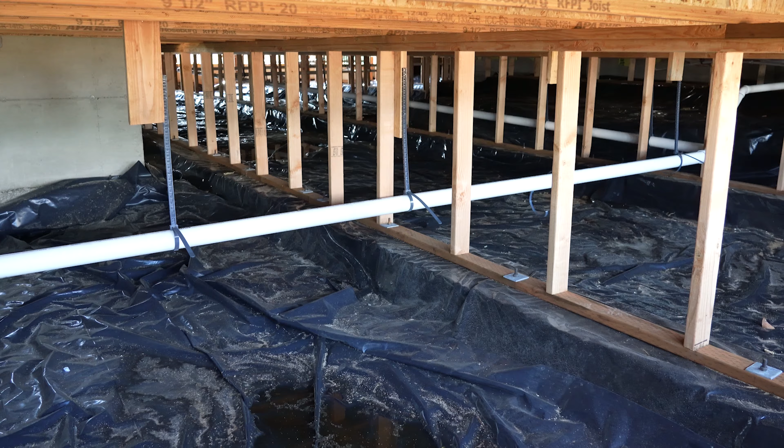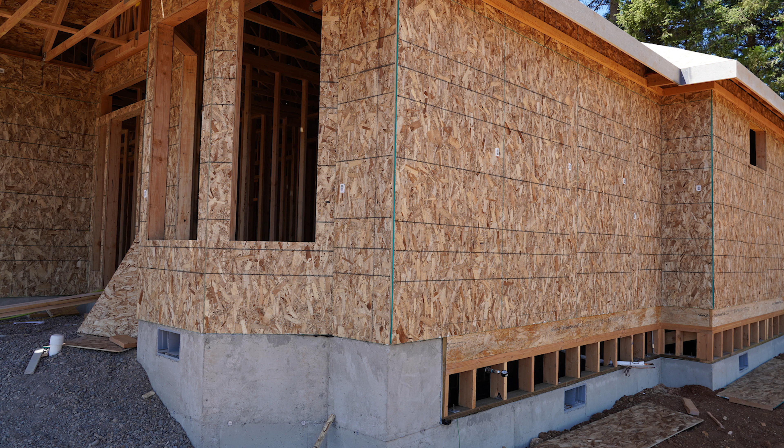This is the Code Update Training for Chapter 11 of the 2023 Oregon Residential Specialty Code, also referred to as the 2023 ORSC. Chapter 11 represents the energy efficiency provisions of the 2023 ORSC. This training video covers significant changes included in this chapter. This video is a continuation of the 2023 ORSC Update Training.

Please note, this training pertains to the residential energy efficiency provisions only. The commercial provisions can be found in the Oregon Energy Efficiency Specialty Code, also referred to as the OEESC.

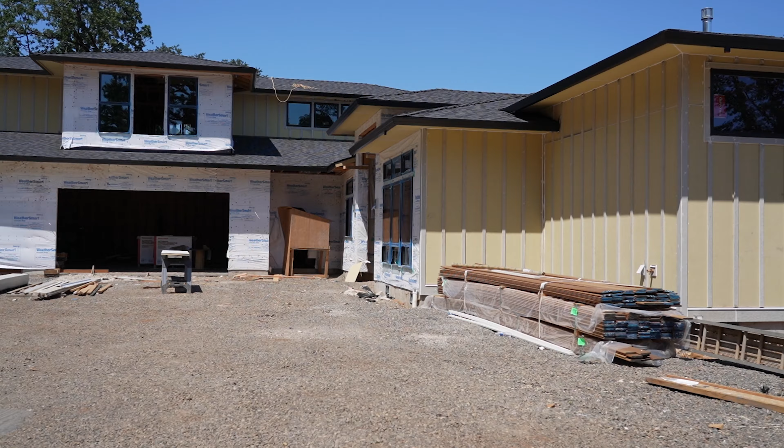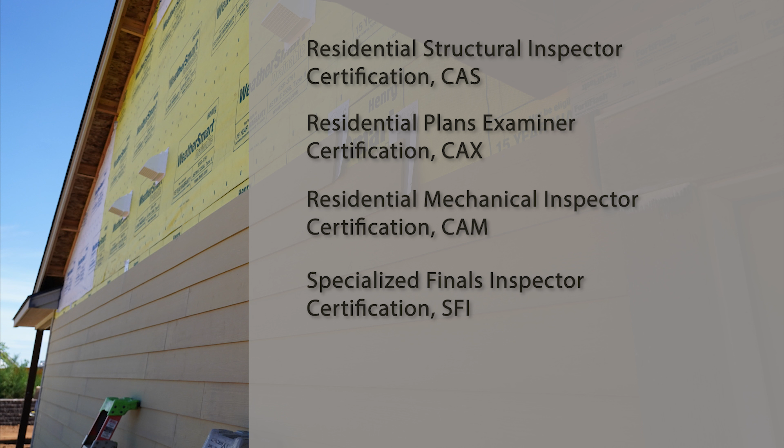All BCD inspector and plans examiner certification holders are required to complete code-related update training, which is provided by the division. The certifications that require this training are the Residential Structural Inspector Certification, also known as the CAS, the Residential Plans Examiner Certification, the CAX, the Residential Mechanical Inspector Certification, or CAM, the Specialized Finals Inspector Certification, the SFI, and the Specialized Solar Photovoltaic Certification, the SSI.

The objective for this training is to identify the significant technical changes to the energy efficiency design requirements resulting from the adoption of the 2023 ORSC.

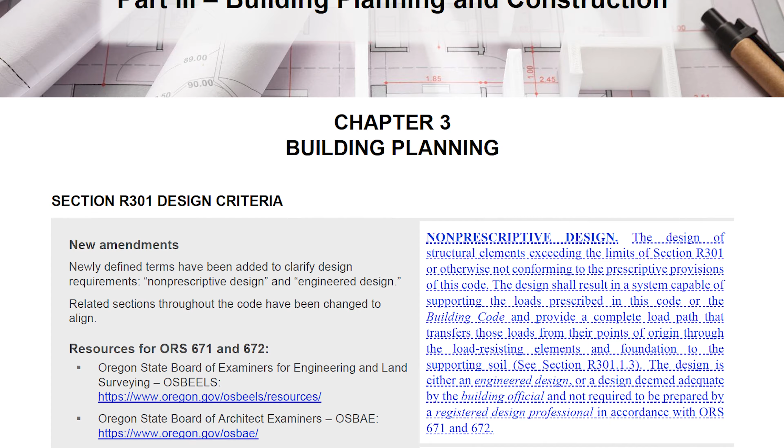For this training video, the division has also created a supplementary code adoption summary that includes the Chapter 11 Oregon amendments highlighted in this video and other important information about the new code. Please note that the formatting for code changes in the summary may be different due to the inclusion of both new and existing Oregon amendments. The code adoption summary is linked in the video description below, along with chapter timestamps to aid in navigation through this presentation.

Hello, I'm Kelly Thomas, Energy Policy Analyst for the division. To kick off the significant changes to Chapter 11, we'll start with existing buildings. Then, in a few minutes, we'll cover new buildings.

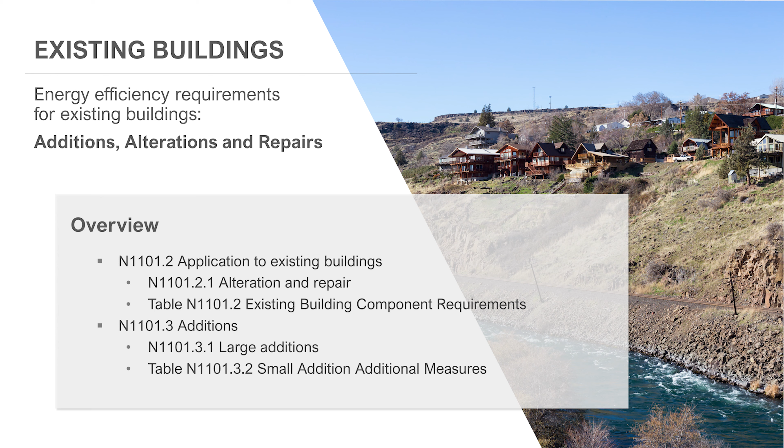For existing buildings and additions, changes have been made to the following sections: N1101.2, clarifying subsection 1 for alteration and repair, along with Table N1101.2 for existing building component performance requirements, and N1101.3, clarifying subsection 1, along with adjustments to the associated table relative to the additional measures options when constructing additions. Let's look at these in more detail.

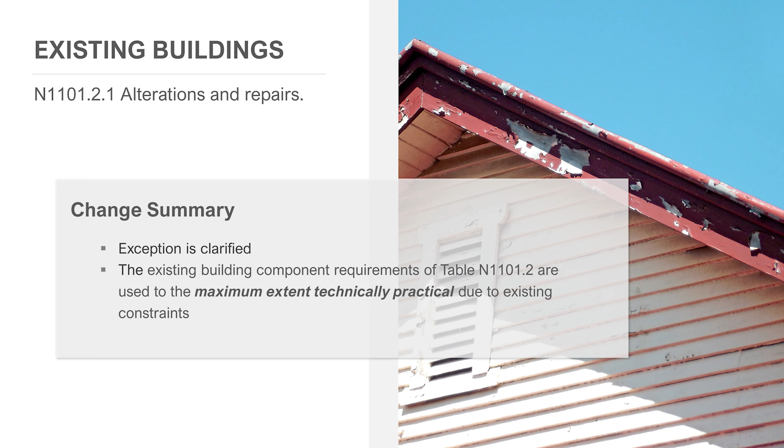In N1101.2.1, we simply clarify the maximum extent technically practical provision, including why the exception is needed. Here, you'll see the existing constraints language is expanded to include real-world constraints such as available cavity depth and allows flexibility for similar constraints.

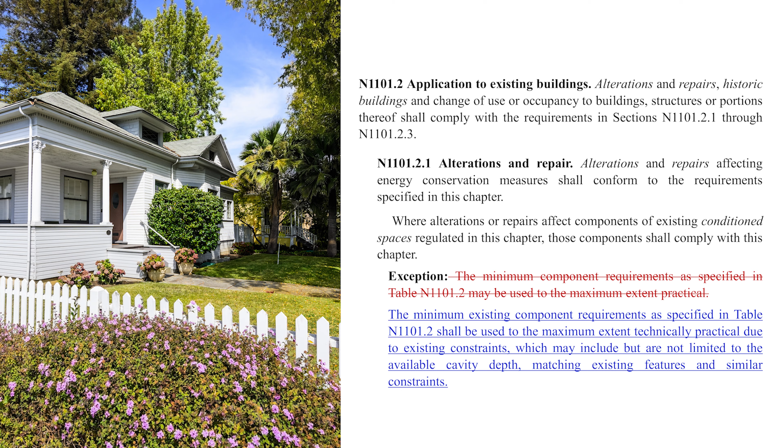There are a few changes to Table N1101.2, existing building component performance requirements. First, we clarified the vaulted ceiling and underfloor joist depth values. Then, we adjusted windows and glazed doors to have an equal performance value. Slab edge perimeter insulation is no longer applicable, as it simply isn't practical for existing buildings. Finally, we deleted the air duct provision, since that is picked up in the HVAC section and not related to the building thermal envelope.

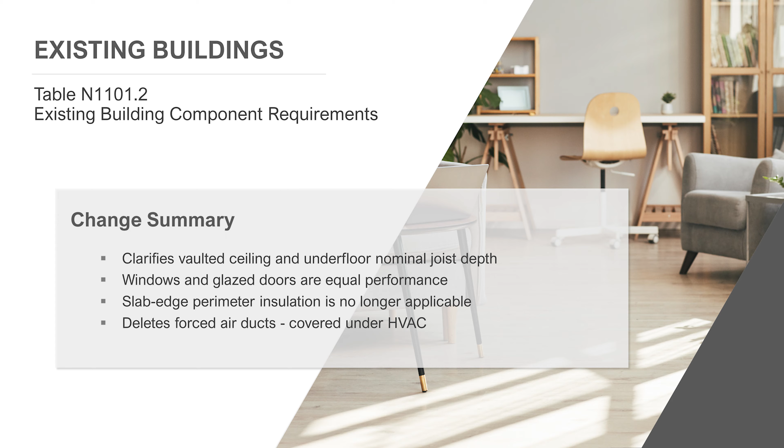Here are those changes. The vaulted ceiling and underfloor joist depths are now clearly split at the 2x10 joist size. Glazed doors are incorporated into the window performance requirements. Classification of exterior doors with greater than 2.5 square feet of glazing was confusing and is no longer needed. Which doors are fenestration versus an opaque exterior door will be discussed in later slides. Finally, the slab edge and air ducts are deleted.

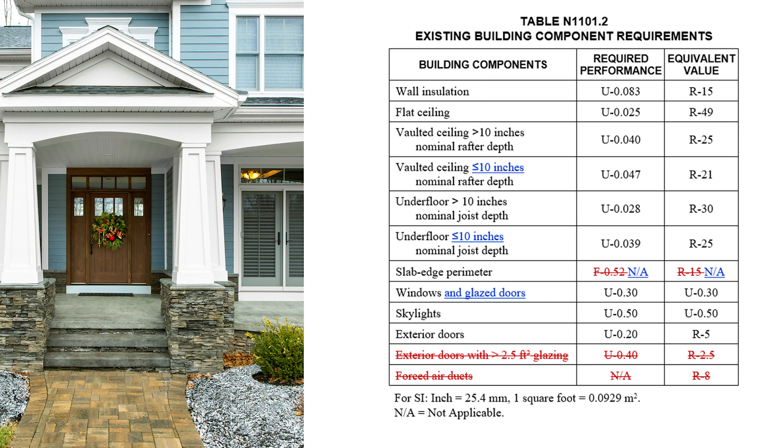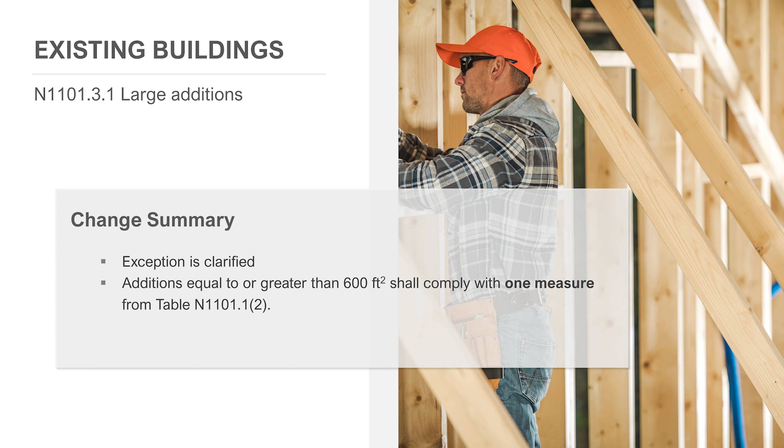Additions. We clarified that one measure from Table N1101.1, parens 2, must be selected for large additions. You can see that reflected here. Our table numbering also shifted slightly, so that is recognized.

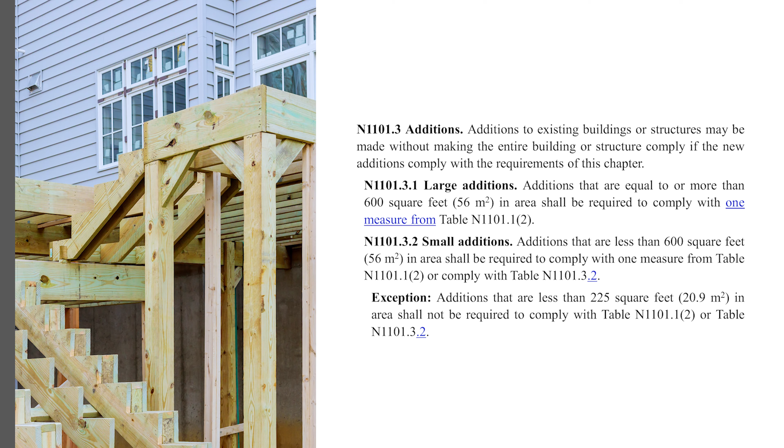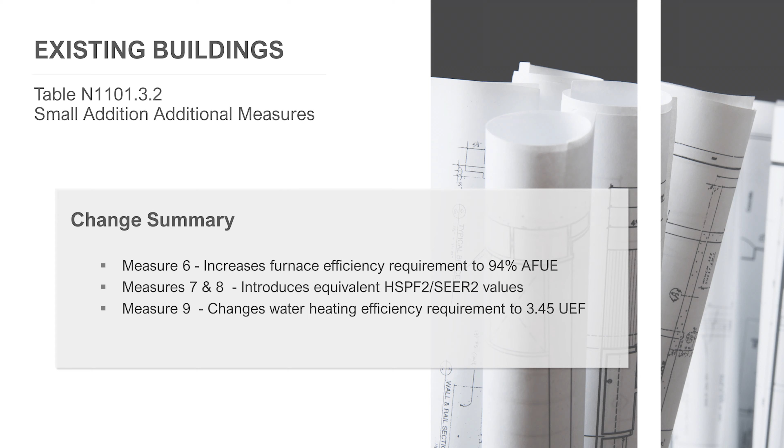Let's take a look at those changes in detail. The furnace efficiency increased from 92% AFUE to 94% AFUE, a common efficiency in the marketplace. With measures 7 and 8, we simply introduce the HSPF and SEER equivalents, HSPF2 and SEER2. The latter come into effect on January 1st of 2023. HVAC systems will have both for a while, and either are acceptable until stock utilizing HSPF and SEER are depleted.

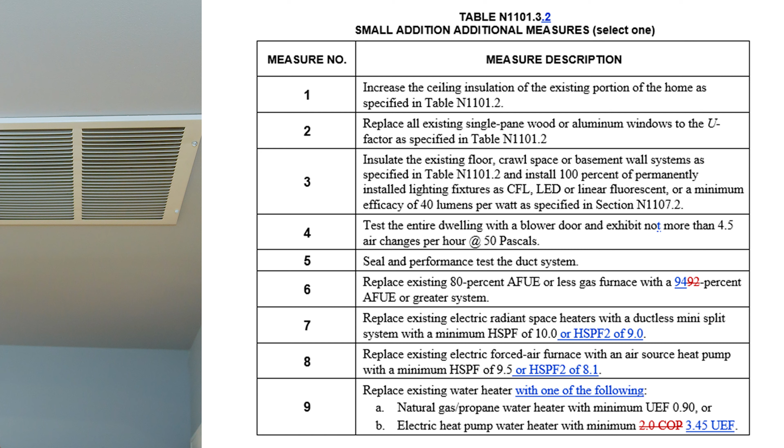Measure 9 changes the water heating efficiency requirement to the industry standard Uniform Energy Factor, or UEF. In this case, 3.45 UEF.

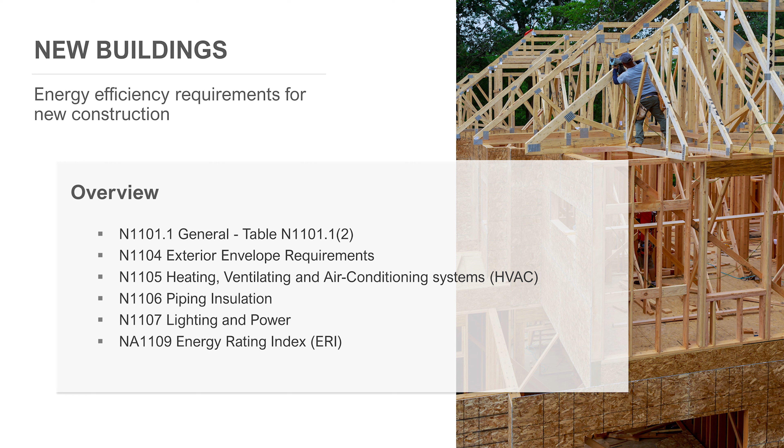New buildings. New construction has significant changes to these main sections: N1101.1, specifically Table N1101.1, parens 2, which is relative to the additional measures; N1104 exterior envelope requirements; N1105 HVAC systems; N1106 piping insulation; N1107 lighting and power; and finally NA1109, a performance path known as the Energy Rating Index, or ERI.

Diving into the revisions for new dwellings, our first stop is Table N1101.1, Parens 2, Additional Measures. There are changes to Measures 1 and 5 for HVAC and ductless heat pump efficiency, Measure 2 relative to water heating efficiency, Measure 7 glazing area has been deleted, and Measure 8, now 7, regarding air leakage and ventilation. Let's look at the changes to that table.

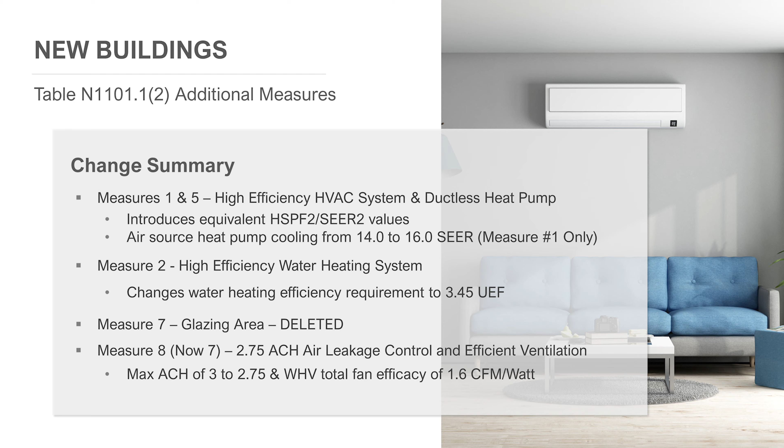Measure 1 increases air source heat pump cooling efficiency from 14 to 16 SEER. It also provides the equivalent HSPF2 and SEER2 values. As previously explained, we have two values using old and new efficiency ratings as required by federal rules.

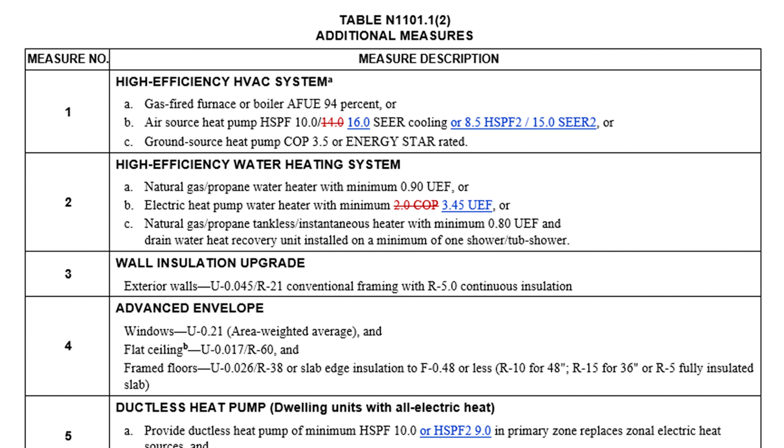Measure 2, similar to Table N1101.3.2, changes the water heating efficiency requirement to 3.45 UEF. Measure 5 provides the equivalent HSPF2 and SEER2 values. The HSPF2 for ductless heat pumps is intentionally higher than that for air source heat pumps.

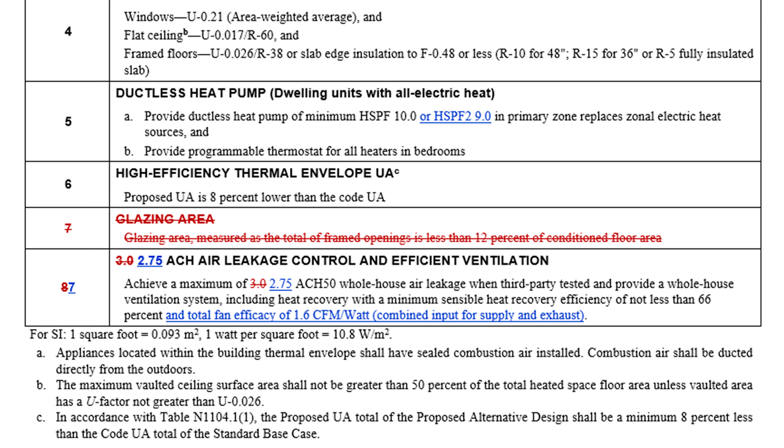Measure 7 is deleted entirely as it was a loophole preventing code progression. Measure 8, now 7, reduces the ACH 50 from 3 to 2.75 when using this additional measure. The prescriptive limit was also reduced, which we'll review momentarily. The new language also sets total fan efficacy at 1.6 CFM per watt.

Feel free to pause this video in order to locate BCD's high efficiency thermal envelope calculator relative to Measure 6 via the QR code.

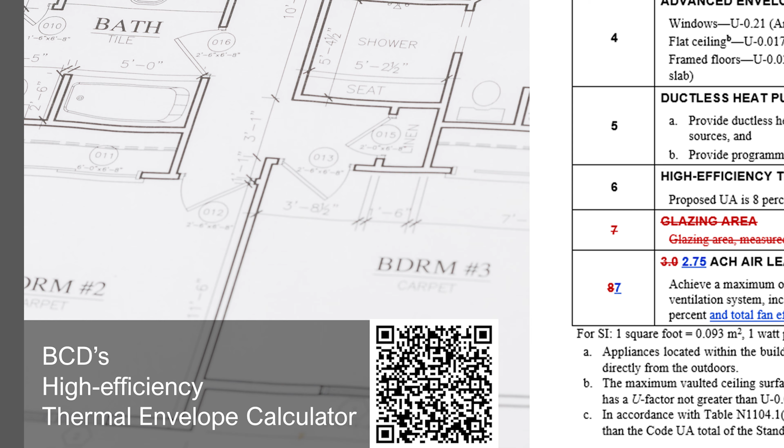The following significant changes have been made to N1104 exterior envelope requirements: Table N1104.1, Parens 1, the prescriptive thermal envelope requirements; N1104.3, exterior doors; and N1104.8, air leakage. Let's look at those changes.

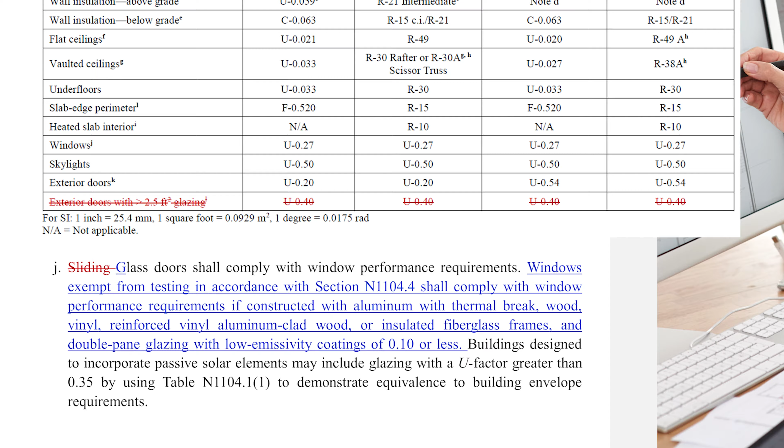Table N1101.1, Parens 1, has a revised footnote J, equating glass door performance requirements to that of windows. As such, the exterior doors with greater than 2.5 square feet of glazing is deleted. Here you can see the exterior doors reference is deleted, and footnote J now reads as seen here, where glass doors now equal the window performance requirements.

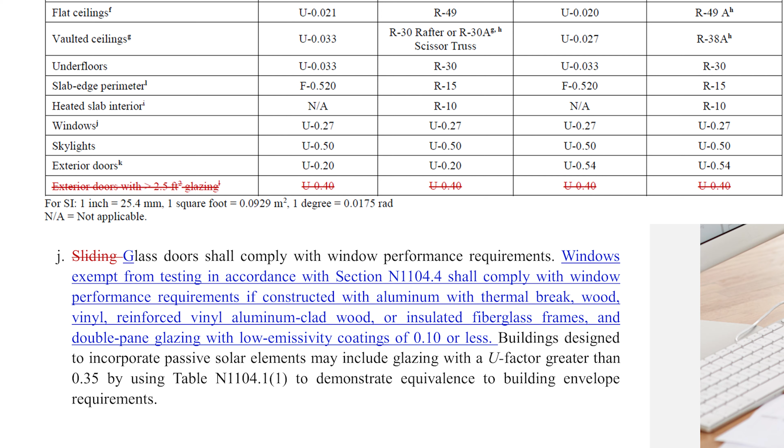Glass doors meet the window's U factor of 0.27, and opaque doors meet the exterior door U factor of 0.20. The windows exempt from testing language is also clarified.

Exterior doors and windows. Section N1104.3 further aligns glass door performance with window performance, deleting exception 3. And the air leakage requirement for exterior doors was moved into the charging statement.

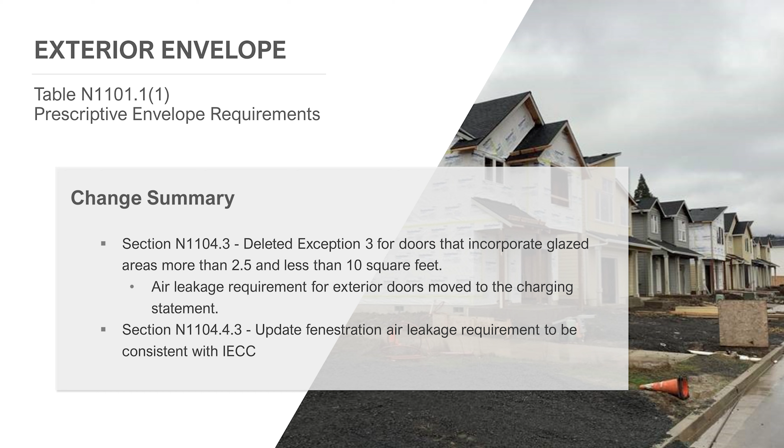Section N1104.4.3 updates fenestration air leakage requirement to be consistent with the IECC. Note here that doors shall be tested and labeled just like windows. Air leakage requirements for doors are contained in section N1104.8. Here again, doors that incorporate glazed areas are no longer an exception.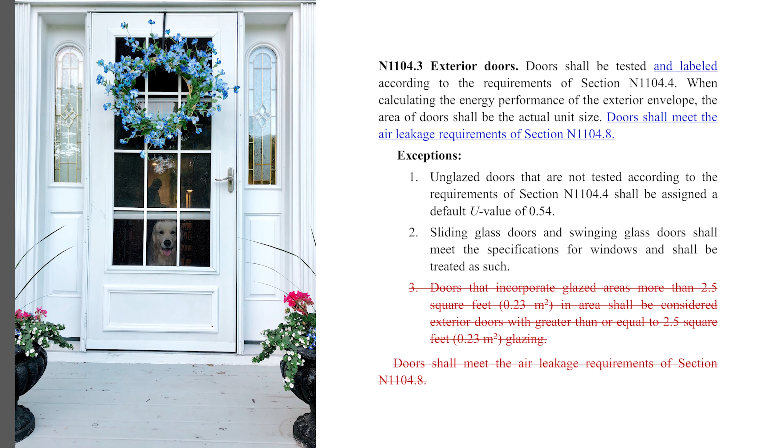New section N1104.4.3 Fenestration Air Leakage. This language is consistent with the IECC.

N1104.8.2 Sealing Required updates this optional path to utilize blower door testing. Blower door testing is not mandatory.

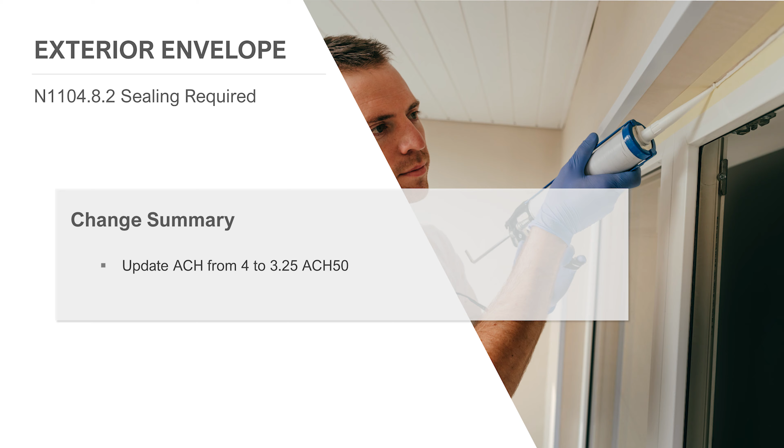The optional blower door test results are reduced from 4.0 ACH50 to 3.25 ACH50. Again, this is an optional path. These new limits are based on data from construction across Oregon where testing occurs. Achieving a continuous air barrier can be done by implementing best practices, which we outline next.

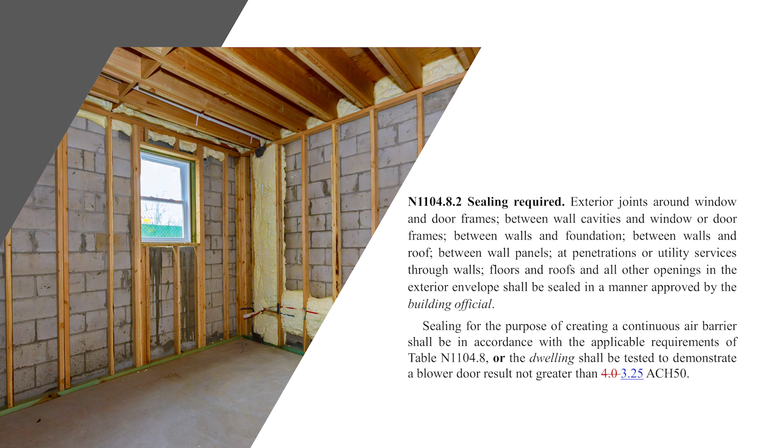Table N1104.8 is an overview of the minimum best practices for air sealing, and they are required. We clarified the windows, skylights, and doors criteria as seen here. You may want to take a minute to pause this video and review the air barrier criteria. Note that an air sealing technical bulletin will be available on the BCD website under the ORSC energy provisions.

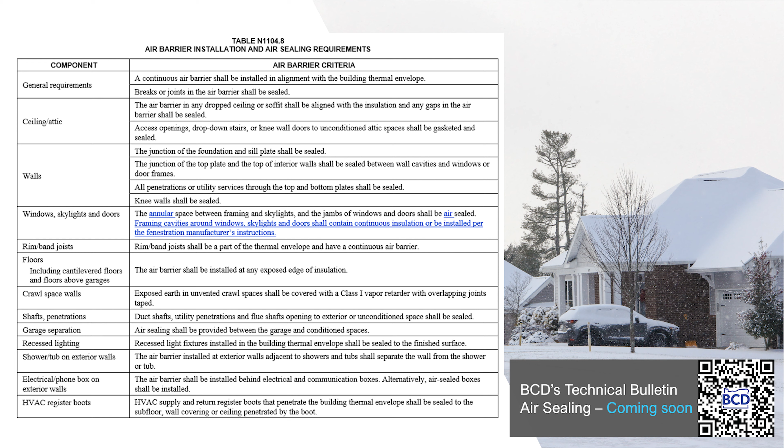N1105 HVAC systems. These significant changes have been made. N1105.3 Installation of ducts and air handling equipment. Deeply buried ducts are now addressed in 3 new sections, N1105.3.1 through N1105.3.3. N1105.4 HVAC controls has changes to sections N1105.4.1.2 Smart Thermostat, a new section, and N1105.4.1.3 Heat Pump Controls. While changes to N1105.6 Ventilation Fan Efficiency addresses Central Fan Integrated, or CFI, ventilation system efficiency. Let's look at those in detail.

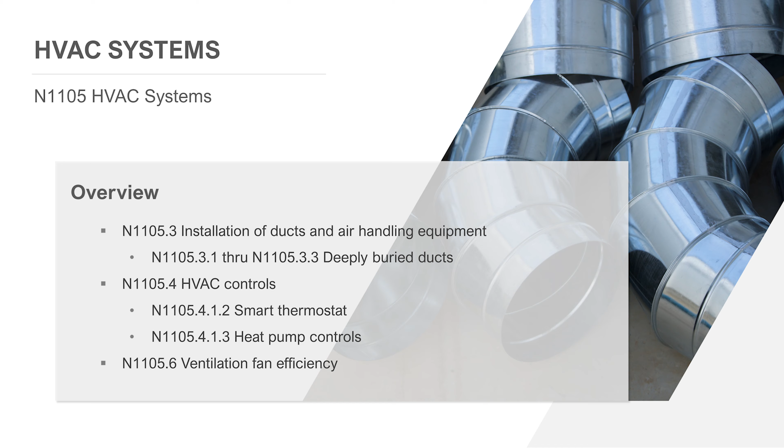N1105.3 Installation of ducts and air handling equipment. The language now requires all ducts, air handling equipment, and appliances to be located fully within the building thermal envelope. It revises the ductwork exception from 5% of the system length to 10 feet total. This change makes it easier to interpret and apply during plan review and inspection. Finally, revisions are made to the exceptions for ductwork located outside of the building thermal envelope.

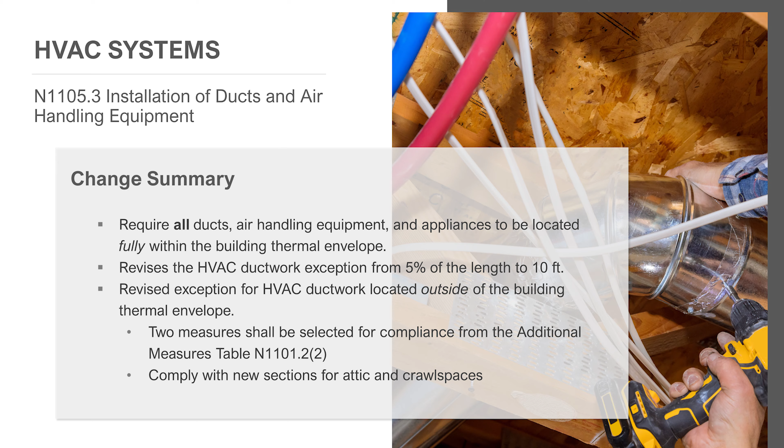2 measures shall be selected for compliance from the additional measures table N1101.2 parens 2, where only 1 additional measure is required if they are located in conditioned space. And 3 new sections were developed for attics and crawl spaces.

Ducts outside of the thermal envelope must be deeply buried. Deeply buried ductwork is outlined in these 3 new sections: N1105.3.1 for attics, N1105.3.2 for unvented, unconditioned crawl spaces, and N1105.3.3 for vented crawl spaces.

In all sections, the ductwork itself shall be a minimum of R8 unless meeting the exceptions for vented attics and vented crawl spaces. This does not include the additional insulation and or other requirements.

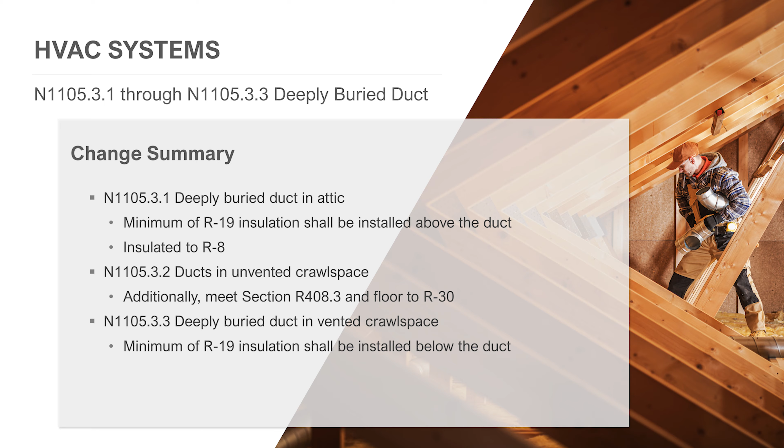The changed language clarifies that N1105.3 applies to additions. The 5% of the HVAC system length exception is clarified to allow for 10 feet of ductwork, not the system, to be located outside conditioned space. This allows for better enforceability.

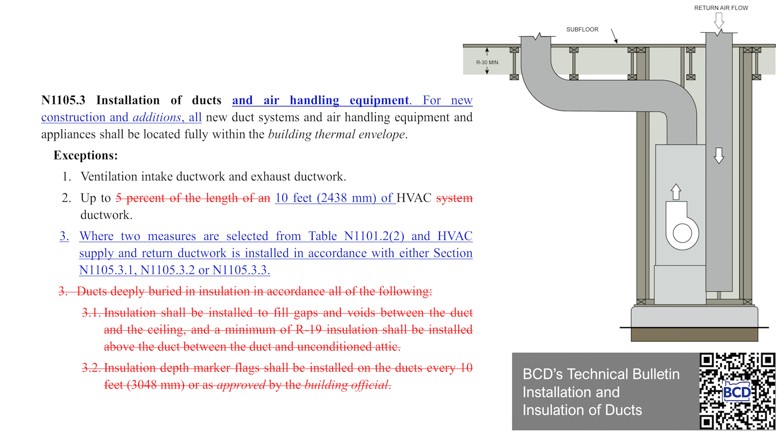As mentioned earlier, two measures from Table N1101.2, parens 2, must be selected for compliance when ductwork is not located in conditioned space. Ducts deeply buried in insulation is deleted here, but expanded in three new sections, N1105.3.1 through N1105.3.3. You can find a technical bulletin relative to these provisions by pausing the video and utilizing the QR code on the screen.

For ductwork deeply buried in the attic, these provisions apply. This language does not differ much from the 2021 ORSC, but a new exception was approved for when the duct is insulated to a minimum of R27 and a Class 2 or Class 3 vapor retarder is also applied.

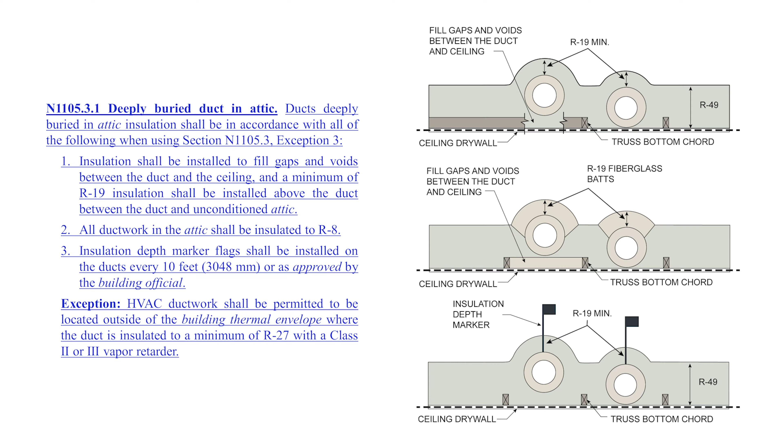These provisions apply for ductwork in unvented crawl space where the crawl space is outside of the thermal envelope and is not conditioned space. The vapor barrier must meet section R408.3 with an overlap of 12 inches and be sealed. The floor between the crawl space and the dwelling shall be insulated with minimum R30.

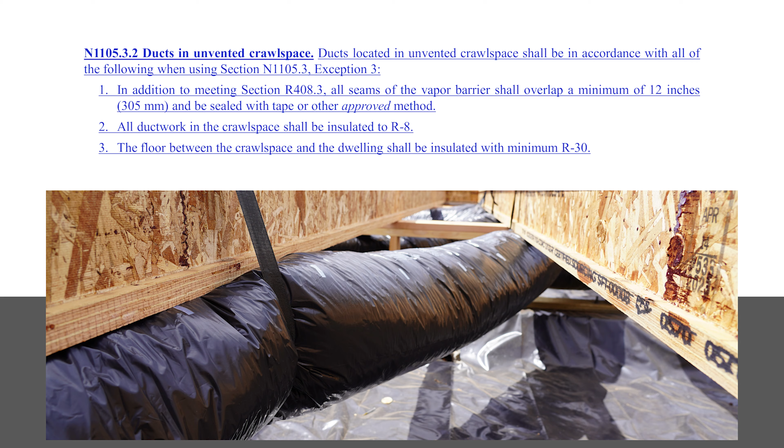These provisions apply for ductwork in a vented crawl space. Think of this as the attic measures turned upside down. Note that these differ from the unvented provisions. R19 insulation shall be installed below the duct and between the duct and the unconditioned crawl space. The same attic exception applies.

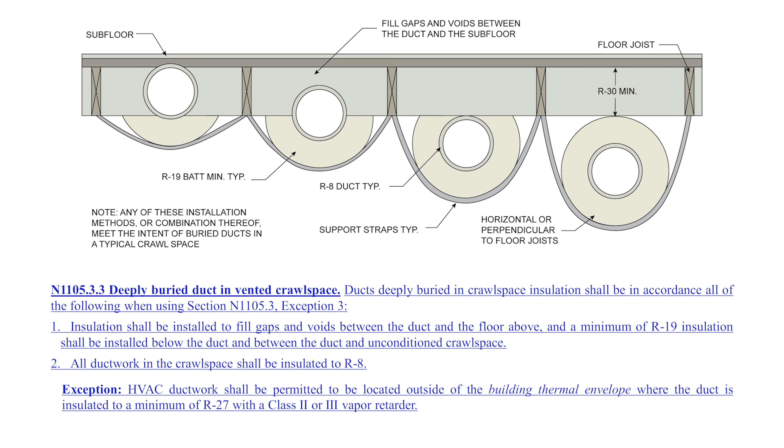Some overdue changes have been made to the thermostat section. Manual thermostats are deleted, and a new section, N1105.4.1.2, for smart thermostats is added. These must meet Energy Star and other criteria.

N1105.4.1.1, setback and shutoff, specifically deletes the manual means for reducing energy. Smart thermostats are now required. They must meet Energy Star criteria with minimum control features of either integral occupancy sensing, geofencing, or an approved equivalent.

Note that exceptions still apply for smaller heating units and smaller cooling systems. Cooling systems with variable speed compressors may require manufacturer's thermostat to provide efficient operation. BCD will be issuing a clarification for variable speed condensing units and heat pumps.

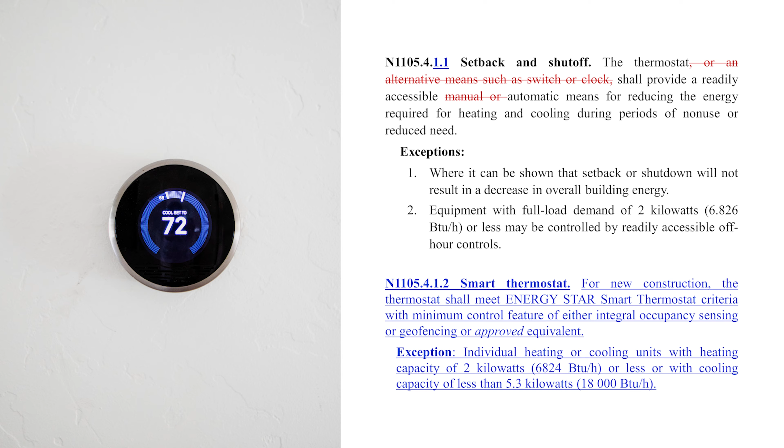Energy Star Product Finder can be used to locate acceptable models. There are at least 45 models available in the marketplace.

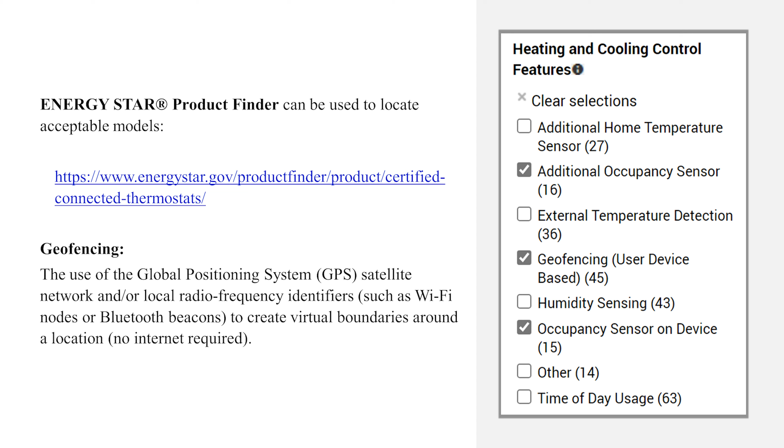So, what is geofencing? We are glad you asked. Essentially, it is a feature that uses GPS or radio frequencies such that no internet is required. The thermostat can sense when occupants aren't home and sets back operation if desired.

N1105.4.1.3 Heat Pump Controls. Outdated manual setback and outdoor thermostat requirements have been deleted and replaced with model code language. Control language for heat pumps having supplementary electric resistance heat has been added.

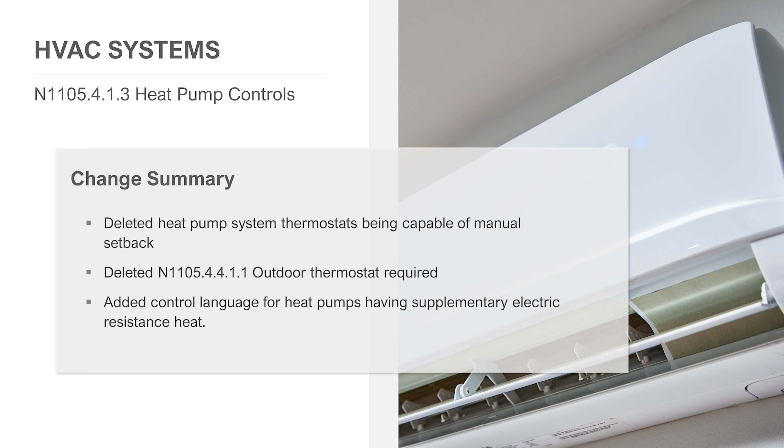Manual setback is removed, and now heat pump controls having supplementary electric resistance heat need controls which prevent supplemental heat operation when the unit can meet the needed heating load.

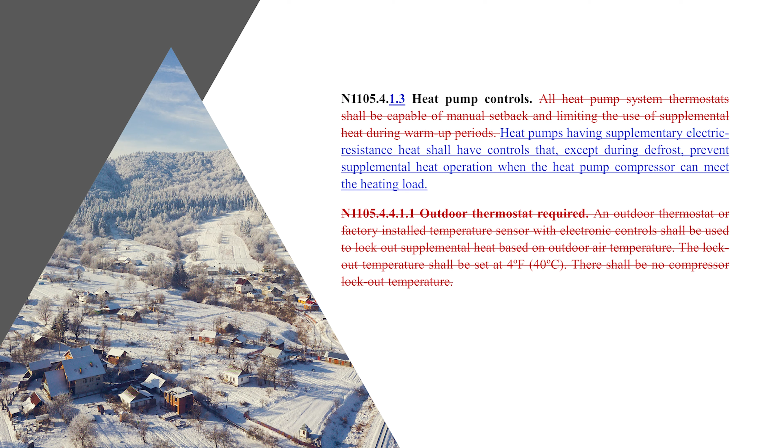N1105.6 Ventilation Fan Efficiency. We established a minimum fan efficacy for central fan integrated, or CFI, ventilation systems in alignment with the 2021 IECC and the draft 2024 IECC.

CFI, or CFIS systems, utilize the furnace fan for ventilation. When the furnace fan is used to provide the outdoor air intake, this section sets the effective efficiency of whole house ventilation system air delivery.

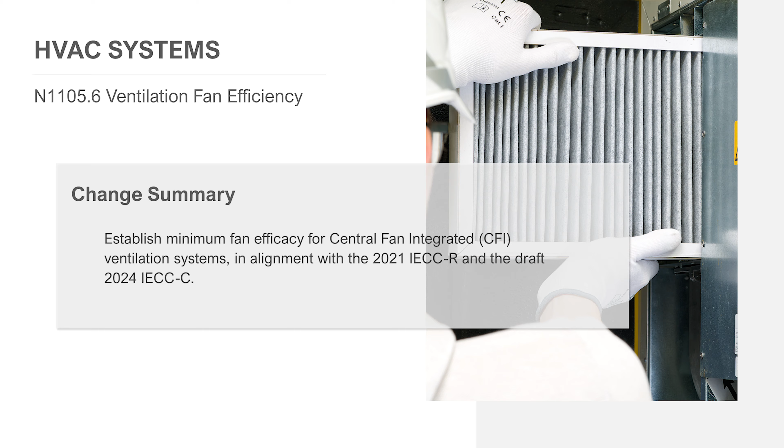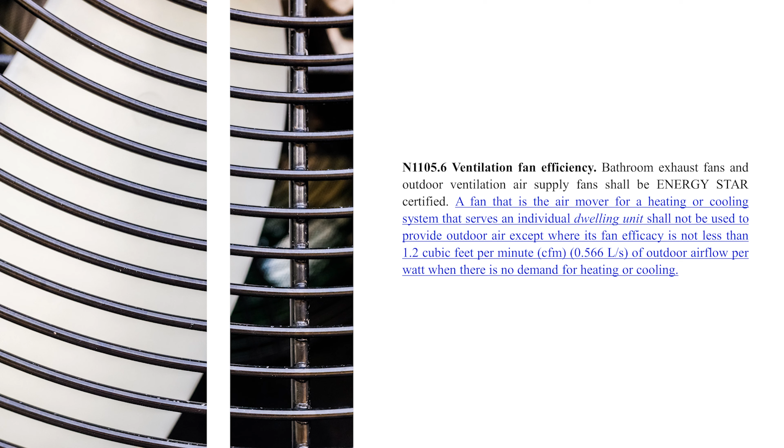When the system is utilized, the effective delivery of the air shall not be less than 1.2 CFM per watt. To achieve this efficiency, most whole house ventilation systems using the furnace will need to have intermittent operation of the system and interlock of the furnace and exhaust relief fan.

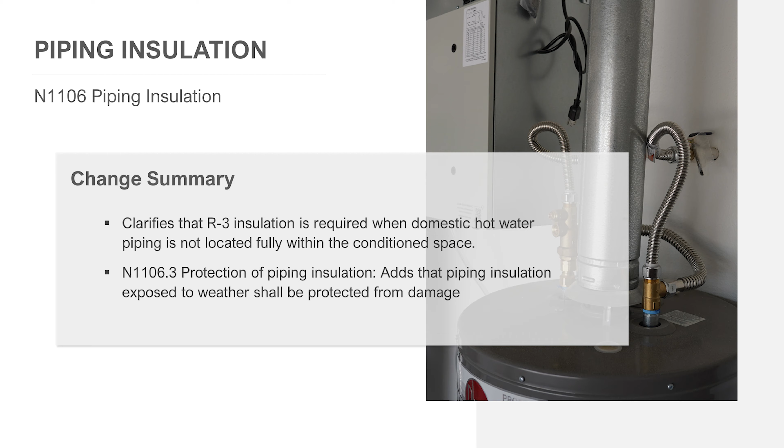Here, language clarifies that piping insulation not fully within the conditioned space shall be insulated to a minimum of R3. The new section N1106.3 is mainly directed at HVAC refrigerant lines which need protection from the elements as seen here.

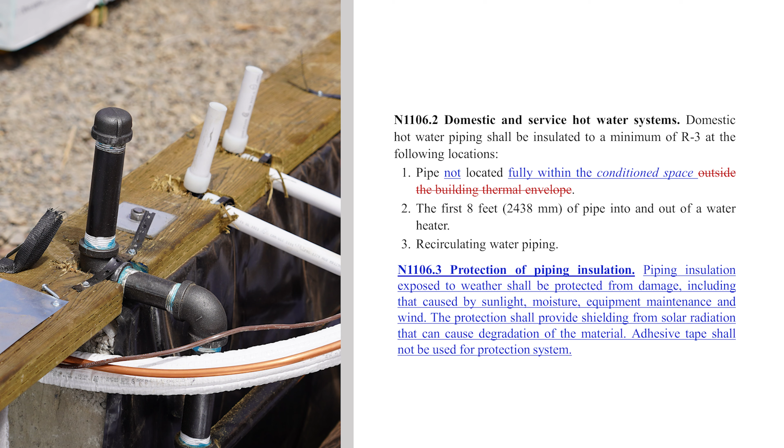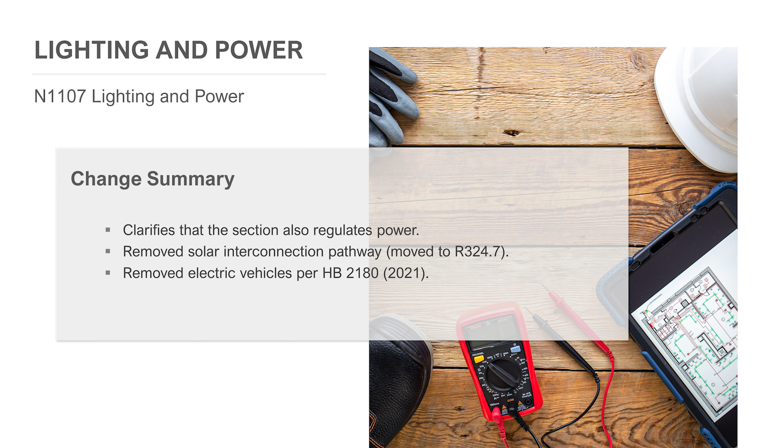N1107 Lighting and Power. Changes include a clarification that the section also regulates power. The solar interconnection pathway was removed from Chapter 11 and relocated to Section R324.7, and the electric vehicle placeholder was removed per House Bill 2180 from the 2021 session. Here you can see those changes.

The new Performance Path compliance option is the Energy Rating Index, or ERI, pathway. This replaces the energy modeling provisions. The ERI language utilized is from model code. The current REACH code language was not utilized.

A backstop is in place as the design must still meet the building thermal envelope requirements of Section N1104. This means super high efficiency equipment cannot take the place of envelope efficiency. This is because the envelope should be around a lot longer than the equipment. ERI maximum values are set for each climate zone.

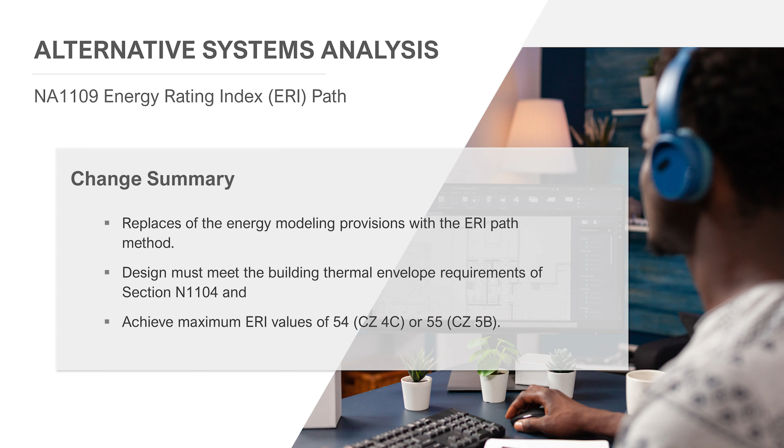On screen is a shortened version of the ERI compliance pathway. ERI compliance is attained only if the rated design meets or exceeds Section N1104 and attains a score of either 54 in Climate Zone 4C or 55 in Climate Zone 5C.

Verification is completed by the building official or an approved third-party inspection agency, which is the most common practice. Compliance software tools, such as REMRate, must comply with RESNET/ICC 301.

Compliance reports are generated by these software tools. Of course, the building official may require additional documentation. When in doubt, input values default to RESNET/ICC 301.

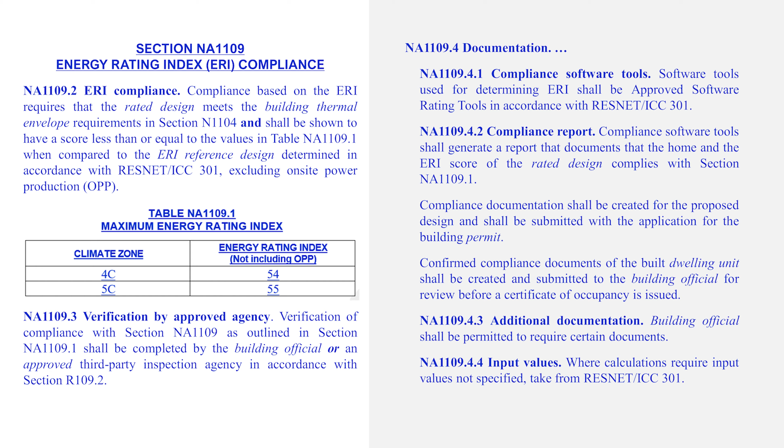Congratulations! This completes the 2023 ORSC Energy Efficiency Code Update Training. Thank you for watching this presentation.